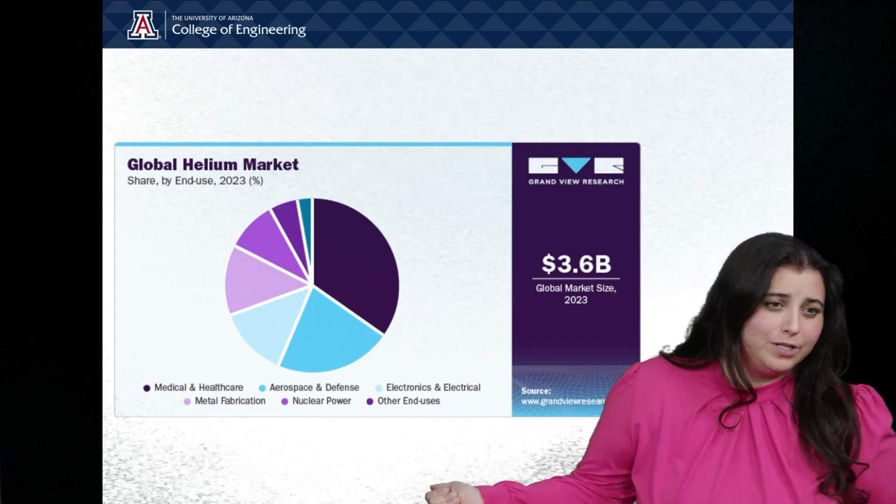We were tasked with designing a system that processes 50 million cubic feet per day of pipeline gas at 800 psig. The natural gas had to be delivered at 1,000 psig with less than 2% nitrogen content, at least 65% helium purity, and 96% helium recovery, ensuring compliance with environmental regulations.

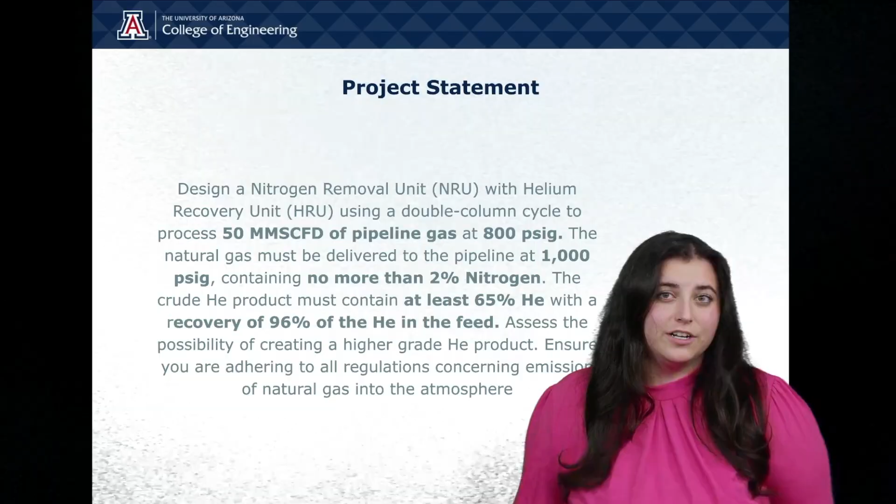So here's an overall view of our PFD. It's broken down into two major sections: our crude helium process and our helium purification process.

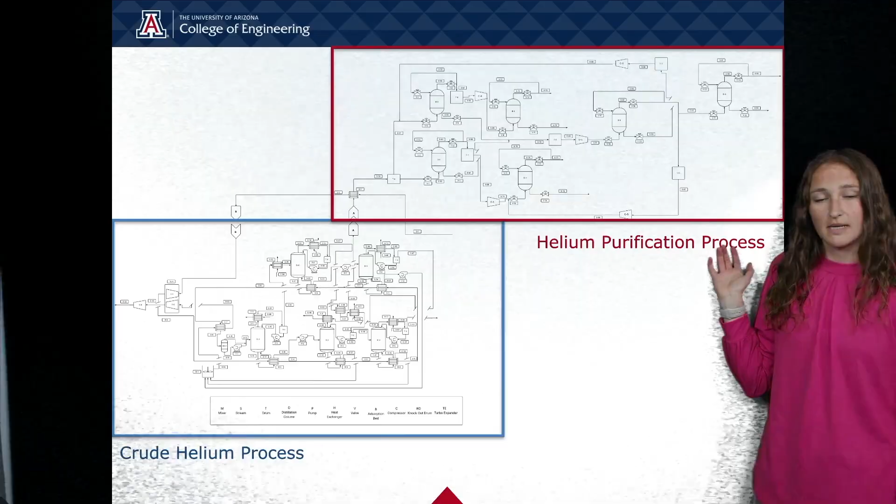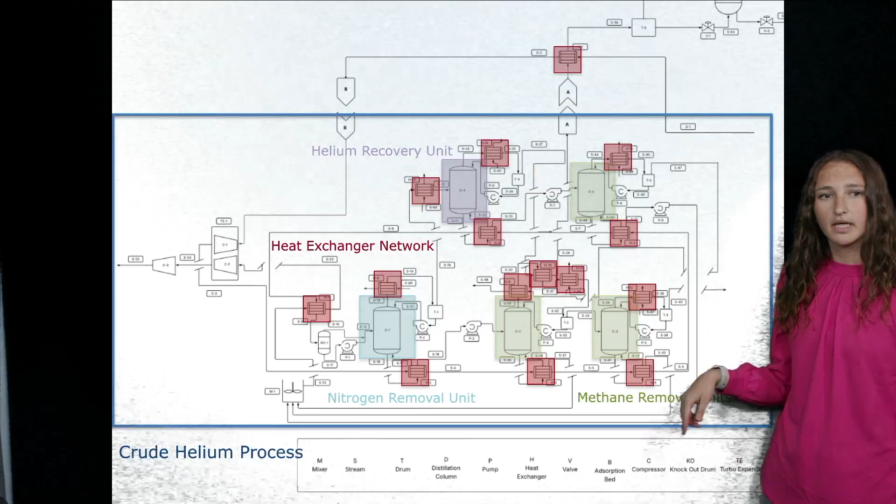The first step we're going to take you through is the crude helium process, which is broken down into a few major parts, including the nitrogen removal unit, helium recovery unit, methane removal units, and our heat exchanger network, as well as our feed, our methane sales gas, and our two nitrogen sales gas streams.

The first major unit op is the nitrogen removal unit, which is a distillation column that separates our inlet natural gas stream based off of boiling point.

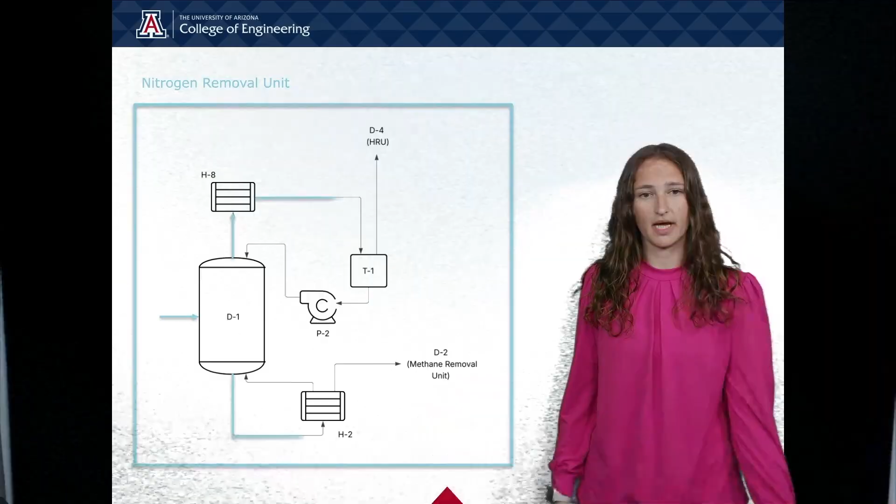We are operating at cryogenic temperatures due to helium having a very low boiling point at 4 Kelvin, nitrogen having a very low boiling point at 77.4 Kelvin, and methane, the lightest hydrocarbon, having a boiling point of 111 Kelvin. Due to these really low temperatures, we are operating at a very high pressure as well to raise the boiling point and lower our operating costs.

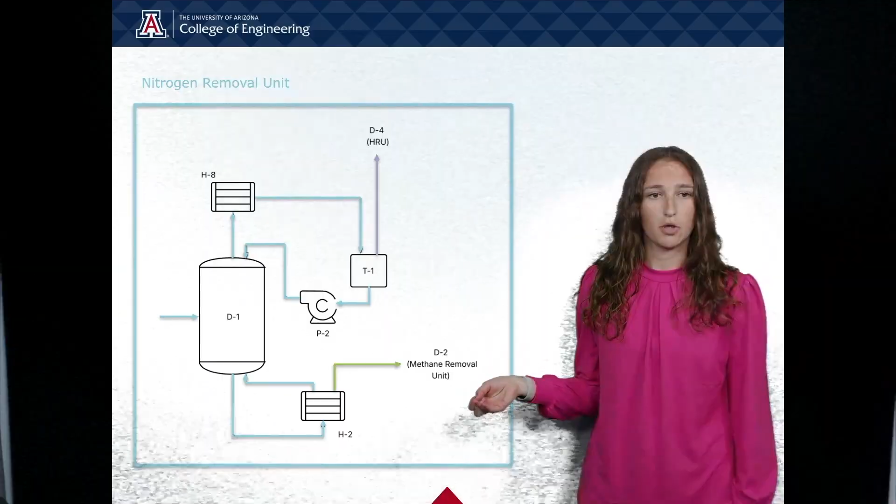In our distillate stream, it is very heavy in nitrogen, methane, and helium — that's just the methane that didn't liquefy with the rest of the bottoms, which is all the heavier hydrocarbons like ethane and propane, and the remaining nitrogen that was not vaporized.

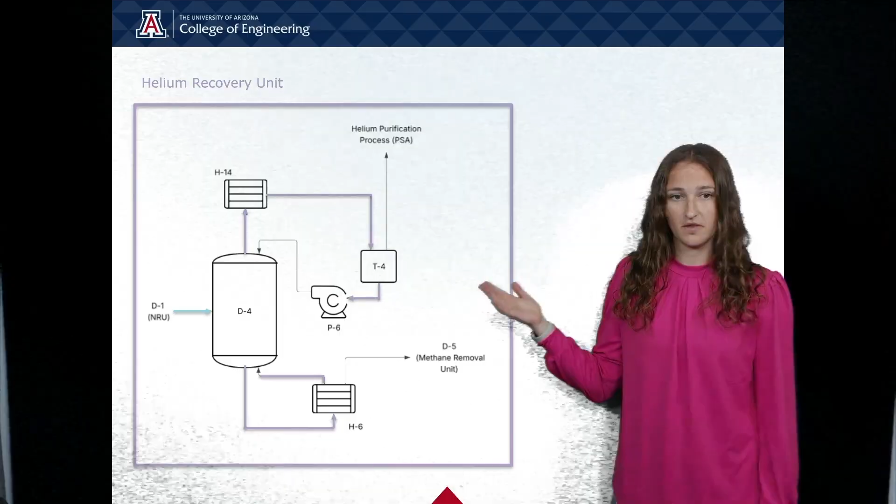The distillate of the NRU goes into our second major distillation column, the helium recovery unit. Its main purpose is to purify the helium out of that stream to get our crude helium product, which is 70.79 mole% helium, meeting and exceeding our project requirement of 65%, while the bottom stream contains the rest of the nitrogen and methane that was not vaporized.

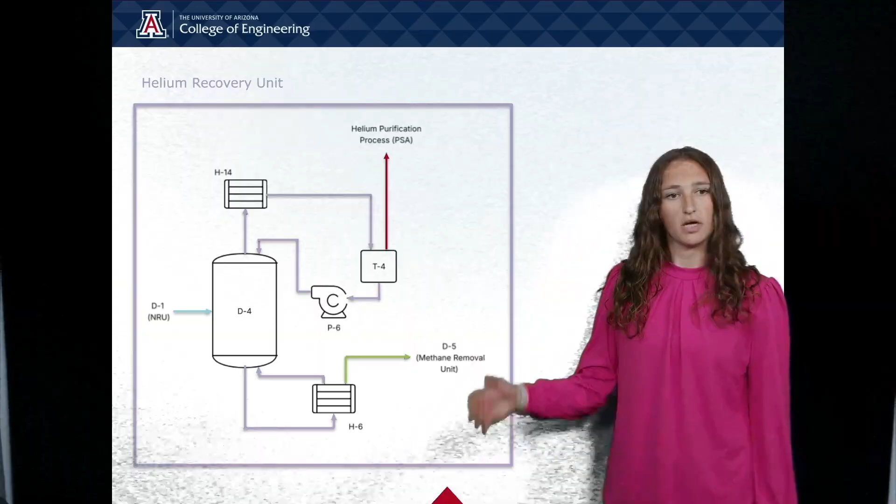The next major portion is the last three distillation columns in our system, the methane removal units. The main purpose of adding these columns was to decrease our methane emissions into the atmosphere.

Last semester, the bottoms of our NRU were directly emitting into the air, releasing 24,000 tons of methane per year. With the addition of D5, we were able to purify the nitrogen to 99.99% purity, which we can now sell at industrial grade, while purifying the bottom methane to be added back into our sales gas.

The bottom two columns, D2 and D3, essentially do the same thing for the bottoms of the NRU. D2's main purpose is to purify the rest of the nitrogen out to get us below that 2 mole% nitrogen content in our sales gas stream.

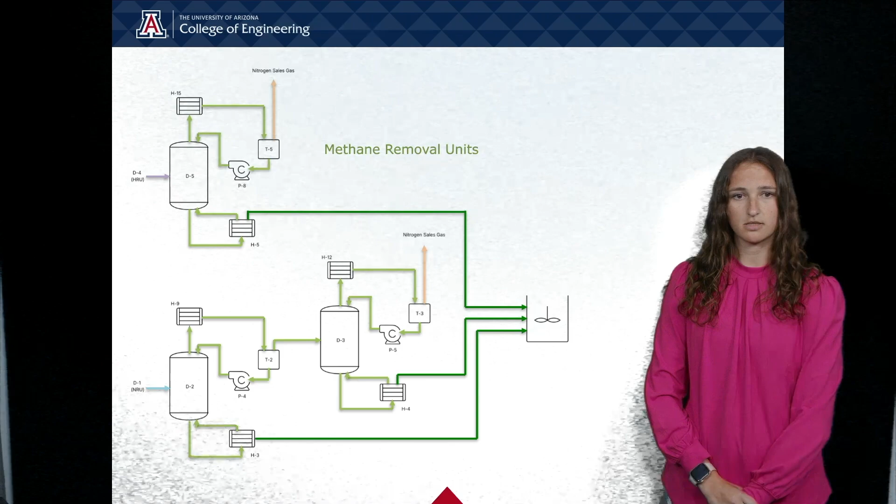All three bottoms are put into a mixer and then sold back to a natural gas plant as our sales gas. Lastly, we have a turbo expander and a compressor for our sales gas, as it has to be returned to the pipeline at 1,000 psig.

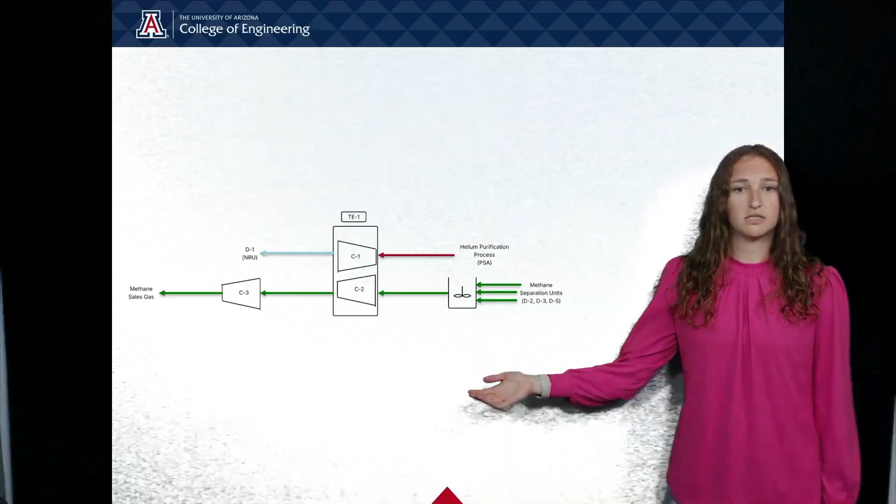The main point of the turbo expander is that the inlet has to be depressurized while the outlet, or sales gas, has to be pressurized. So the work shaft generated from the turbine is input into the compressor to help decrease our overall energy use in the system, while there's also excess energy still needed for the rest of the pressurization, handled by the additional compressor at the end.

Our system has several heat exchangers. Because we have so much cooling duty requirement due to the cryogenic temperatures, we implemented a heat exchanger network which uses recycled streams to recover as much heat duty as possible.

You can see that our feed runs through that ambient exchanger entering into the purification system, and then it basically goes through all of the column reboilers to provide the heat duty.

We also have some cooling duty recovery: the bottoms of all the methane purification systems work to cool the inlet feed down to cryogenic temperatures. And we have the distillate from both the HRU and the HRU methane removal unit that work to provide some cooling duty to the second methane removal condenser.

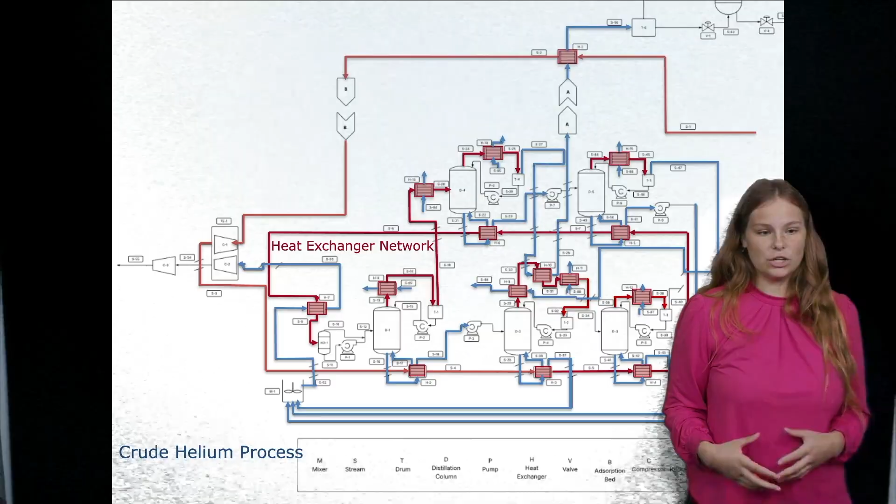Overall, the addition of the heat exchanger network, rather than just using utilities for all of the exchangers, provides about a 45% reduction in utility use cost.

So the second part of our process is the helium purification process. For this, we use pressure swing adsorption. Our first part of our crude process primarily uses distillation as the separation mechanism. The reason we're using PSA for the helium purification is because once you get into the higher purity helium, it becomes difficult to separate out using distillation.

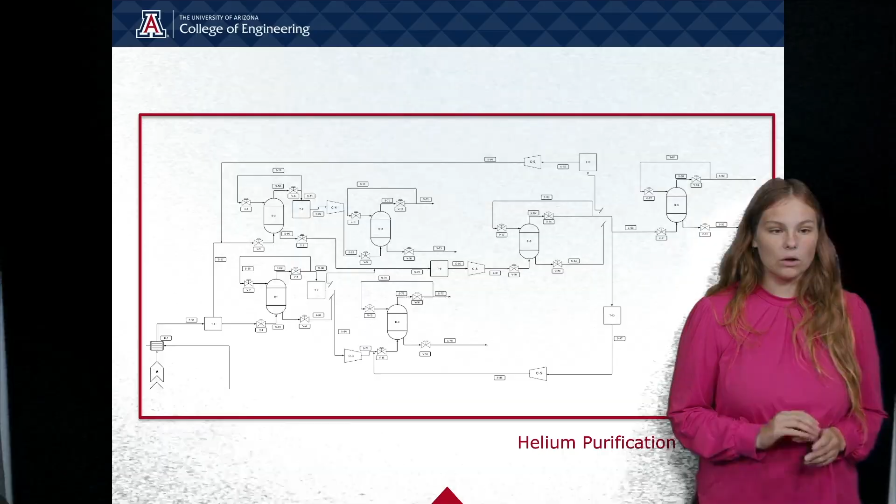We were able to bring our purity up from 70% at the end of the crude stage to 99.99%, which is grade A helium, and we also ended up with a recovery of about 83%.

PSA uses physical adsorption. If you're looking at this, where the smaller molecules represent helium and the larger molecules represent hydrogen, you can see that the hydrogen adsorbs to the sorbent while the helium, for the most part, is pushed through the system. This has to be done at a high pressure to basically force those molecules onto the adsorbent.

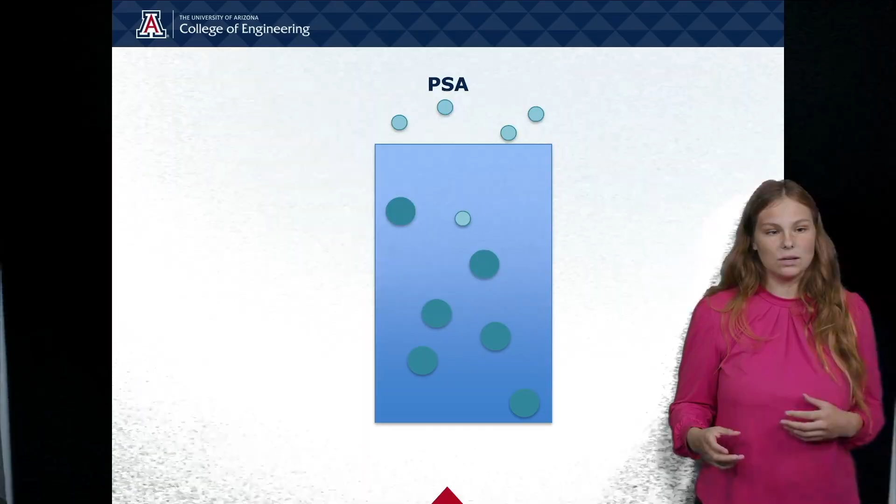In our system, we had to use two different types of beds: one to remove nitrogen with the adsorbent as zeolite 5A, and then a second to remove hydrogen, using a lithium nickel adsorbent, since they have different capacities to absorb the impurities in our crude helium stream.

So really quickly, the PSA uses a 4-step cycle: Step 1 adsorption, Step 2 blowdown, Step 3 purge, and Step 4 pressurizing.

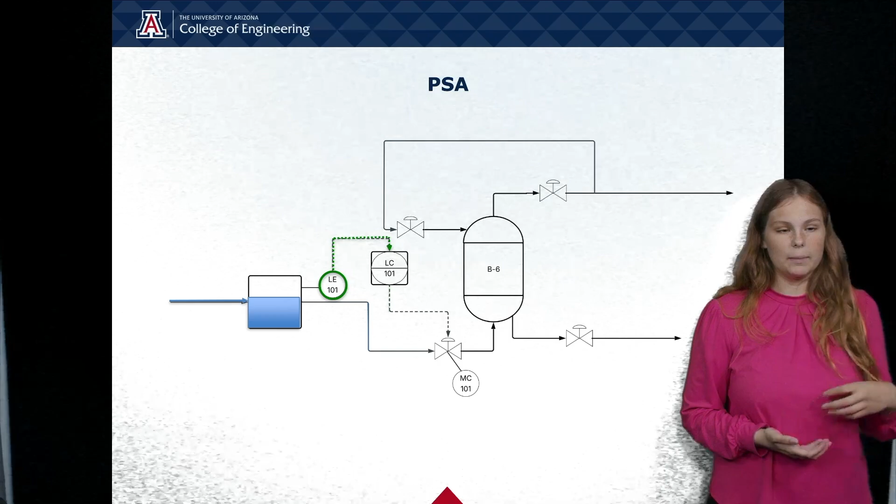Finally, in our PSA system, because we're on cycle timers and all of the beds, we have 6 beds total, all of the optimized step times are different. So we have to use some process control loop, and this allows for the feed to fill up to that level, and then once the level is high enough, the level controller can alert the valve essentially to open and the bed to pull feed once there's enough feed for the adsorbent step.

From the beginning of the project, our team has analyzed multiple decision matrices to ensure aspects of process and environmental safety were considered. As the process itself was designed, we constantly discussed concerns of both overpressurization and large amounts of hydrocarbon emissions being produced. To minimize overpressurization concerns, a pressure safety release system should be implemented.

Pressure control valves should also be implemented as appropriate throughout the system, ensuring operating pressures remain within appropriate ranges. When the pressure of any unit operation reaches or exceeds a designated value over the equipment's explosive pressure, the emergency shutoff plan should deploy. The system should be cleaned of scale to meet API 510 standards, and it should be checked for damages.

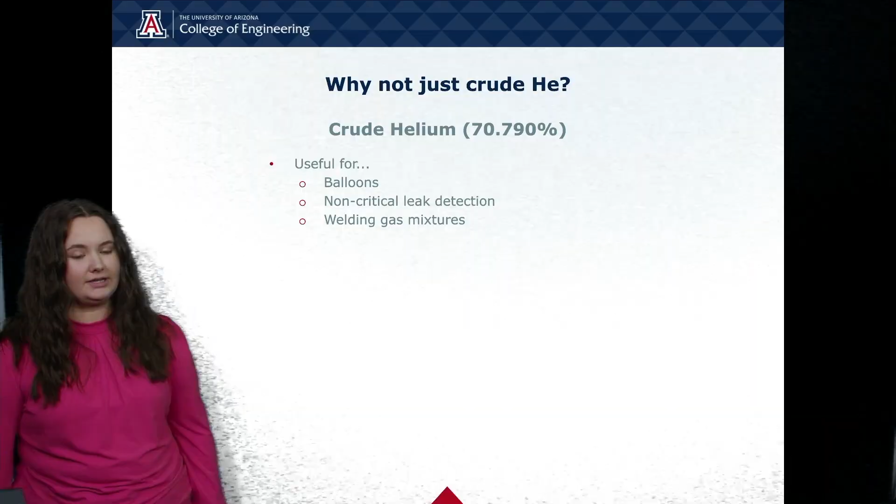Other ideas were also explored to address operator safety concerns. So if helium is in such demand right now, why are we not just selling our crude helium? Crude helium is used for applications such as balloons, non-critical leak detection, and welding gas mixtures. Grade A helium, however, is a little bit more useful for laboratory applications.

So now let's compare the economics. For our crude helium process, we're going to have the large amounts of our equipment costs coming from our heat exchangers and our compressors.

And then when looking at the bare module costs that include considerations such as valves and installation costs, we have a total equipment cost of about $40 million for our crude helium process. And when looking at the bare module cost of our grade A helium process, we're at about $48 million.

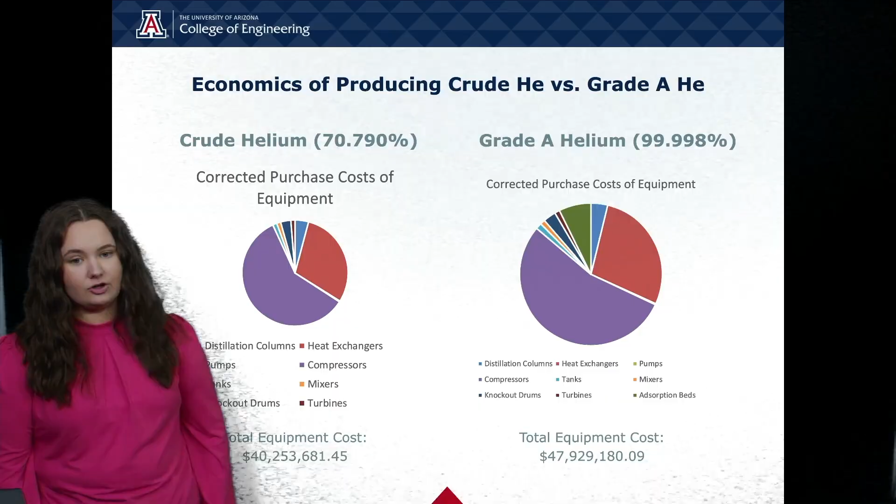The first constraint was that nitrogen in the pipeline natural gas had to be less than 2%. In our crude helium process pre-optimization, it was at 6.2%. What we were able to do to get to the final 1.89% was to add those methane removal units.

The project constraint was a 65% helium purity. Right off the bat in our crude helium process pre-optimization, we were able to get to a 70.79% helium purity, which was elevated even more to 99.99% with the PSA being added.

As you can see, our final crude helium process with the PSA had a lower helium recovery, but we were able to get that higher purity. We were also able to meet the helium recovery constraint with the crude helium process.

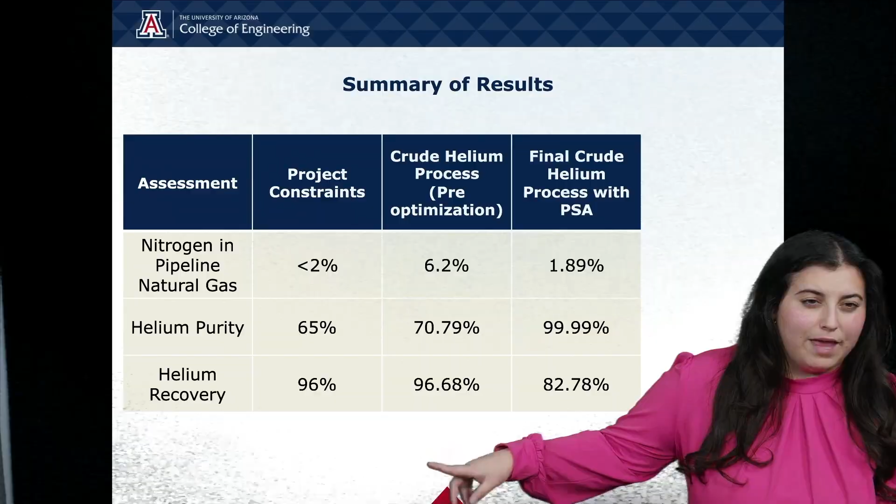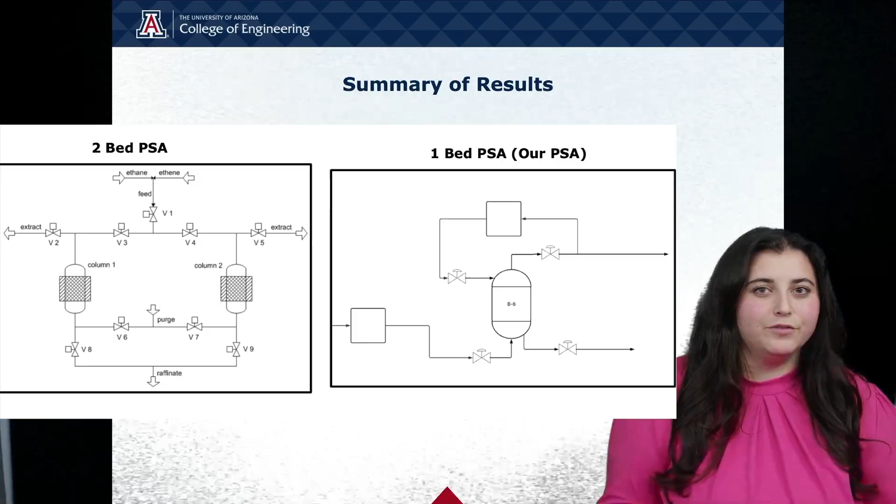Further recommendations for this project would be opting for a 2-bed PSA design that will allow for pressure equalization between the beds, removing the need for extra compressors, which will also likely increase recovery.